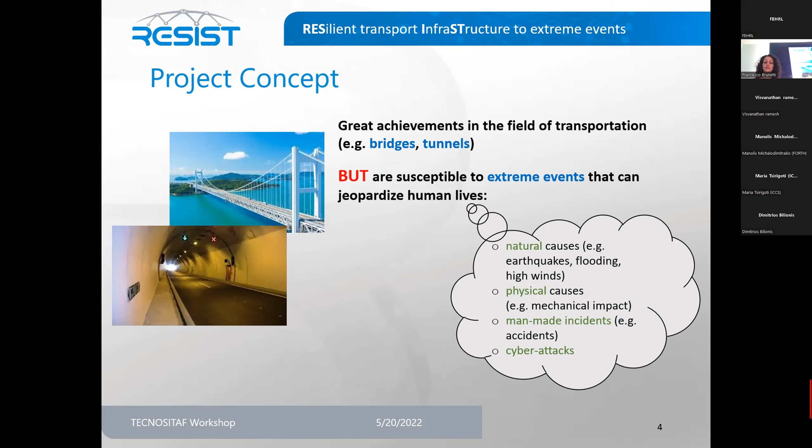Let me start with the concept of this project. So even if we have great achievements in the field of transportation, the infrastructure can still be affected seriously from extreme events that may put human lives at risk. These events may be caused by natural causes, for example earthquakes, floodings, etc., physical causes, or man-made events, or even cyber attacks.

So the objectives of the Resist project are, obviously, to protect users and ensure that mobility will be seamless, avoiding any human cost but also financial costs as well; to prevent and predict such events and also increase the resilience of infrastructure through vulnerability and predictive analysis and risk assessment; and also to react to such events, providing information to minimize the impact and restore services as soon as possible.

Here are the innovations of the Resist project. We have the aerial robots, some custom drones that are used for inspection and also for mounting sensors on bridges and tunnels. We have the ultrasonic sensors suitable for these drones, the computer vision system, secure and resilient communication system.

A cross-layer cybersecurity module, a mobility continuity module that is focused on providing seamless mobility for passengers and freight even under extreme events, and a risk assessment and management of such extreme events. All these are combined in an integrated Resist platform, providing a holistic approach to all these procedures.

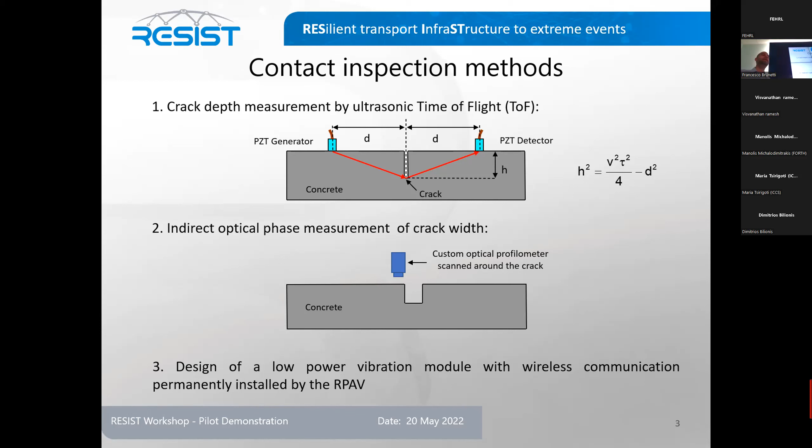Here we can see we have realized this on the left. This pulser receiver unit is a custom solution because in the market we haven't found something with the specification that was needed in the project, because we wanted the possibility to tune the frequency, to use several transducers at the same time, to have an actuation voltage between 350 to 3 kilovolts to use also powerful transducers—that's really important in the measurement of the depth of the crack. Also we have integrated a high resolution time-to-digital converter, to measure with really high precision the time between the emission and the detection between the transmitter and the receiver. Also, this kind of system has USB communication, so it can be easily controlled remotely by using the PC on the drone.

On the right, we can see the integration of this kind of system on two different platforms. On the left, on the top, we have the end effector realized by CATEC in Spain, used for the bridge inspector. On the bottom is the platform realized from the University of Seville with the integration of our module for the tunnel inspector.

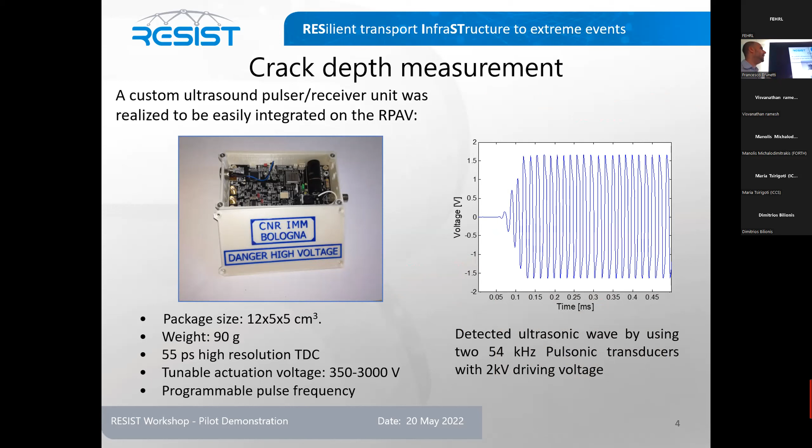Here we can see just an example of an acoustic wave detected by using this custom pulser receiver unit. You can see the signal is really nice with low noise. We can easily determine the time of flight, so the time between transmission and detection, and determine the crack depth.

So instead, here we can see the idea for the optical profilometer. Basically it's a simple optical phase measurement, indirect in particular, like a LiDAR system. We use a modulated laser source that is used to interrogate the target. Then we measure the optical power reflected by the target using an avalanche photodiode. By comparing the phase of the transmitted wave and the detected wave, you can determine precisely the distance.

In this way, with the translation stage inside the module, we can scan around the crack and determine the width. We started from a commercial range meter that we have modified in the firmware and in the optics to reach the specification that was needed in the project. In this case, we wanted to determine the width with a precision of 0.1 millimeter. So also the spot diameter of the laser has to be less than 0.1 millimeter.

So we changed the optics. We go with the drone really close to the crack, because the right distance is the focal length of the lens that we use in the system. And we use also the Goertzel algorithm to determine the phase shift. In this way, we can determine really precisely the width. We have successfully validated this kind of measurement in the drone realized in CATEC.

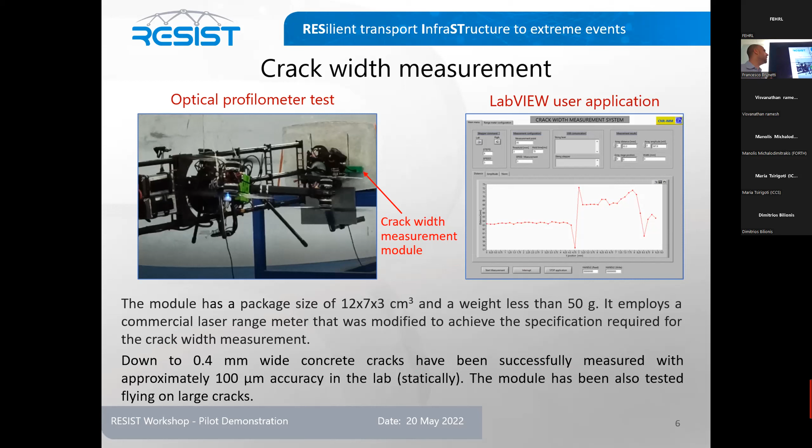Here we can see a measurement realized on an artificial crack sample of concrete there on the left, and on the right the measurement where we have developed a user application where the user can set all the measurement parameters, like the power of the laser, the sampling frequency, the algorithm used, the parameters of the Goertzel algorithm to use in the measurement. And we have successfully measured the width for cracks down to 0.4 millimeter, and we have validated flying on a larger crack.

Here we can see the idea for the vibration module. It's really simple. We use a 3-axis accelerometer from Analog Devices. It is a 3-axis accelerometer with a really high signal to noise ratio, with the digital conversion inside. The user, by means of a user application at the ground station, can set all the measurement parameters, like, for example, the acceleration range, the sample frequency, the cutoff frequency of a low pass, high pass filter that can be used inside the electronics. And in this way, we have created a really small network where each vibration module has an address and can be interrogated by the receiver on the ground.

This module exploits wireless sub-gigahertz communication, so we can have real-time continuous measurement for more than 3 days. But of course, if instead of measuring continuously, we measure only some time during the day, we can have a battery life of months. Also here, it depends on the frequency of the measurement that you want to realize.

Here we can see the integration during the Metsovo trial. Here on the left, you can see the LED. Basically, the drone attached this vibration module. This is really small. It's less than 40 grams with a diameter of 5 centimeters, on the wall by using a UV curable glue. So we stay on the wall just for 10 seconds for gluing the module. And then at this point, the module starts communicating with the ground station by, as I was saying before, sub-gigahertz communication. So there is a continuous communication. So the user on the ground can set all the measurement parameters and so on.

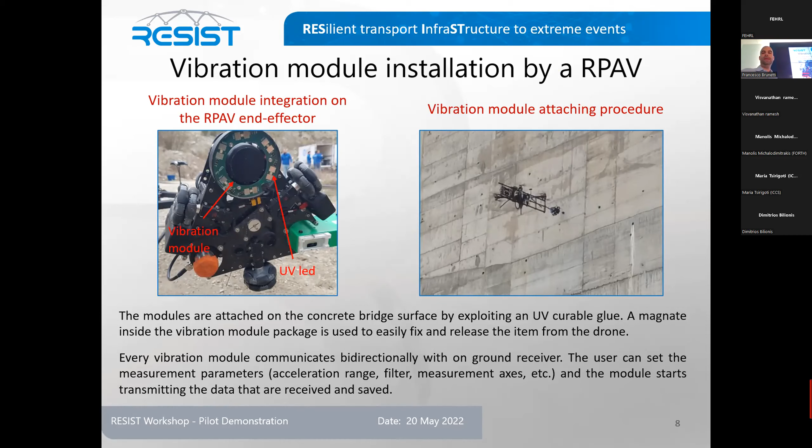Here we can see the user application that we have developed. On the right, it's just really simple. We can see the 3 axes of acceleration with acquisition in real time, but there is also the possibility to plot the fast Fourier transform of the acceleration data, so to see the vibration mode of the structure that you are investigating.

Now, Rafael can continue with the vision, or someone else. Guillermo gets here. Okay. Okay, so let's go back to our schedule with the presentation of the RPAS. Just give us 1 second to change the presentation. Okay.

Okay, good morning. So I'm Guillermo Heredia from University of Seville. So we are going to present the aerial robots, or the drones, that we have developed in the project for installing the sensors that you have seen before from CNR, and you will see later, for inspection of the tunnel surface. So the general idea of the project was to develop not a robot, but a flying robotic system, because there are several sensors that have different needs. So at the end, the main sensors,

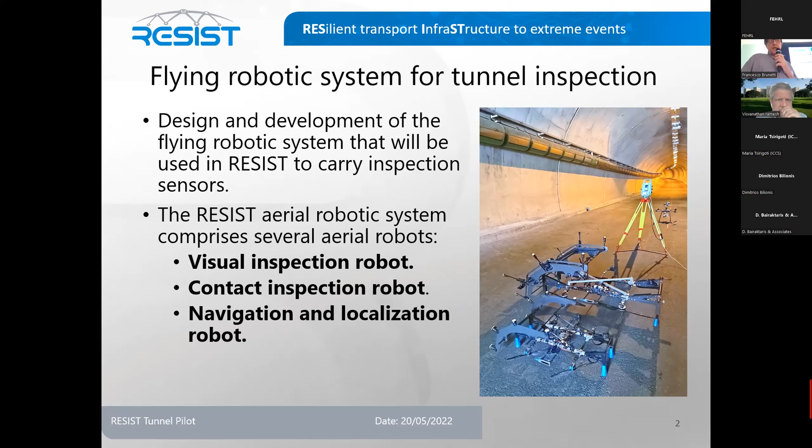we have decided to use 2 different aerial robots. One is for the visual inspection, where we will mount the camera module, and the other is for contact inspection. So the one for visual inspection is a quadrotor drone with adaptations. We have installed a gimbal for camera stabilization and orientation that is installed on top of the drone, so it is adapted to inspect all the inner surface of the tunnel. And also, an important point that I will talk about later is it uses the localization system inside the tunnel for autonomous control, so that it can follow the waypoints of the flight plan that is transmitted to it.

The second one is a drone for contact inspection. So this is a new design that is adapted to the inner walls of the tunnel. So the idea is that it is able to touch and attach to different parts with different inclinations of the tunnel, and with the sensors that are mounted on the tool, it is able to sweep in 2D.

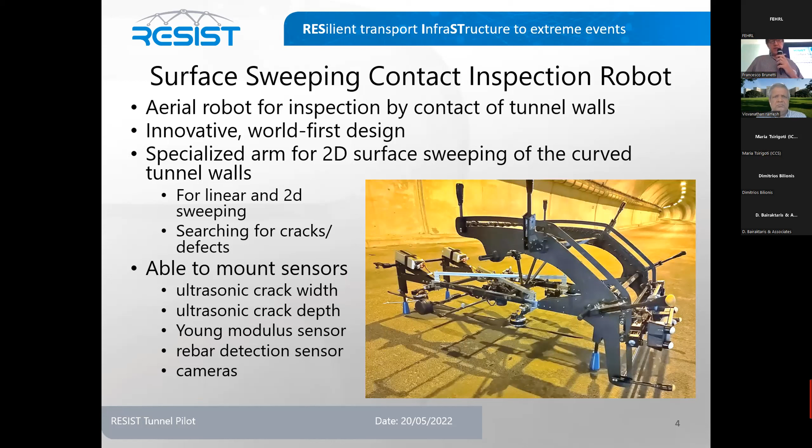So it is able to do linear motion, and also in the curved direction, just to inspect the surface or to look for defects and measure there with more precision. And it is able to mount the ultrasonic sensors, or the Young modulus sensor, also the rebar detection sensor, and also cameras. You can see here the general configuration of the tool.

It has three servos. One is when it's moved around this curved dimension. The other one in this linear direction, and the other one, sorry, this one, is used to adapt to the different inclination of the tunnel walls.

This is the first design of this class, and it is used for inspection of the tunnel walls. You can see here some experiments. The idea is that with these supports, it is able to touch the different inclinations. So in this part, it would be higher, and with these two supports, it would be even higher. And you can see here that this is the image of a camera that is mounted on the cart. But there we can mount any of the sensors that we are discussing today.

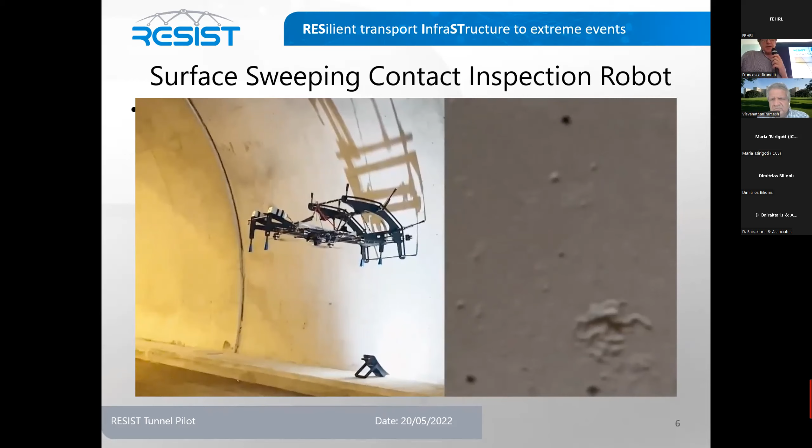Then an important point is the localization. So for autonomous flight, it's very important that the aerial robot knows in any instant where it is in relationship with the environment. Inside the tunnel, it is not possible to use the usual methods for localization, like of course GPS or GNSS, or even the vision-based or LiDAR-based SLAM techniques, because of the symmetry that the tunnel has. It is impossible to use them because it gets confused about the position.

So we have developed a localization system that uses on one hand a total station that calculates the position with a prism on board and transmits it to the drone, and also some onboard sensors that are two 2D LiDAR sensors and one range sensor. The 2D LiDAR sensors are used to obtain the relative position transversal to the tunnel.

You can see here the output of both lasers. One is this curve, that is the transversal position, and the other one that is in the horizontal position is just used to obtain the distance to the wall. And with these two, it is able to localize in this transversal plane, and also to close the loop to be able to touch and autonomously attach to the surface. The other one, that is a range sensor, is used to obtain the position along the tunnel line in the longitudinal position.

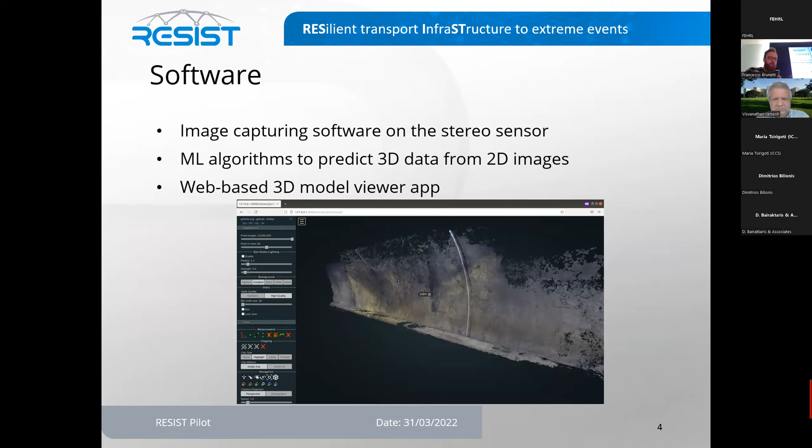And finally, as mentioned, we have the web-based 3D model viewer app, which you can see here, and we'll later get a video on how this interacts with the components. Thank you.

Thank you, Rafa. So for the next presentation, we will have our colleagues from our group who will present it online. Can you give me access to the screen share? Yes, you have it. Okay, thank you.

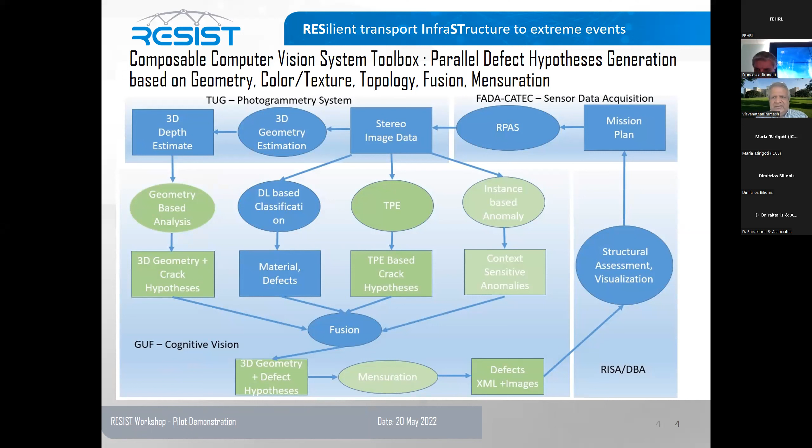Okay, I'm Viswanathan Ramesh. I'm from the Goethe University in Frankfurt. We did the computer vision part. As already mentioned in the beginning of the whole presentation, the whole architecture involves essentially taking the drone-based images, sending them to 3D reconstruction and getting stereo data, and then doing analysis.

The main aspect of what we have been doing in Frankfurt is to build a composable toolbox that allows you to deal with a variety of situations and flexibly use our modules and compose them so that we can perform the inspection task. And it has certain parallels to human intelligence and the way in which we think about cognition. Now, what I'm going to do is quickly show some of the work that we've done in the context of RESIST, and also the results we got from the particular pilot.

So we have a variety of different modules which address various aspects of visual inspection, which go all the way from using physics-based models and understanding the properties of the application in the physical context, and then using them to build algorithms where expert knowledge is embedded so that you can reduce the amount of data required for analysis, or in other words, for training and learning.

Then there is the other side of the equation, which is that we need to have invariance, meaning that we need to be invariant to lighting, weather, and other conditions, and therefore we need robust methods. So we have a modular approach where we can implement a multitude of modules, each addressing sub-aspects of the problem, and then they all run in parallel and combine.

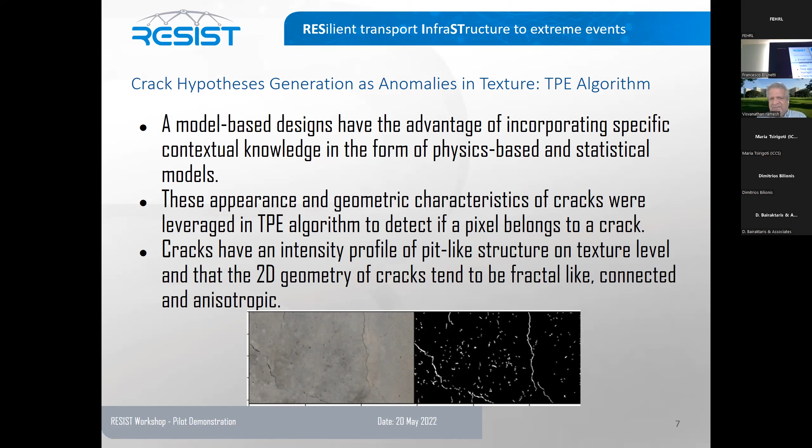So you can see that with the physics-based models, given an image like this, you can produce hypotheses. We think of each of these parallel modules producing hypotheses. So here you can see that in this particular image, you can get a lot of the cracks and also small defects, which are not necessarily defects. And the point is that cracks are treated like fractals, and they are connected, and they are anisotropic.

And one of the major innovations that we have done in this project is this idea of using just one image instance, using these model-based ideas from physics-based models, combining them with modern deep learning, where the deep learning method learns the background texture from a single image.

So what we do is that we take a single image and then we produce some response like this, and then we use that response to mask the image and say to the neural network, learn the background pattern as much as you can, and then try to fill whatever you don't see here.

So in a sense, it's more like saying, okay, I have an assumption about the world, meaning that the texture is continuous, and that texture you learn from that particular image, and then you compare them. So effectively, it is more like a background subtraction. So this is what we have done. And here is an illustration of that work where you have the original picture, and then you can see this neural network learning actually the background estimation, and then the difference coming out.

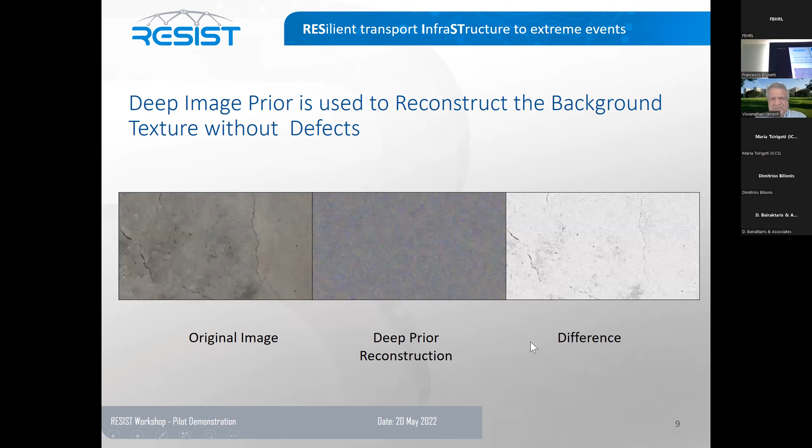Now, then you can see certain results on real data sets. Then I'm going to skip that. And now there is the other angle that was basically a novel innovation in this project. That is actually the fact that we now use 3D data with the TU Graz. So therefore, we can actually think about how 3D geometry, along with actually cracks, can be essentially extracted.

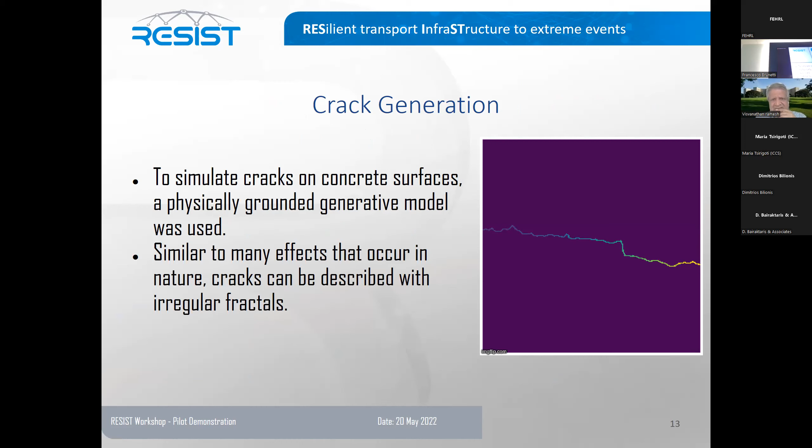And then the next slide will show you basically how we take that data and then we can produce all kinds of things like graffiti, moss, and other types of defects so that you can sort of simulate reality using a whole range of perturbations. And then you can use those data sets along with the architecture to take this input data and separate them into cracks, surface normals, and then depth variation.

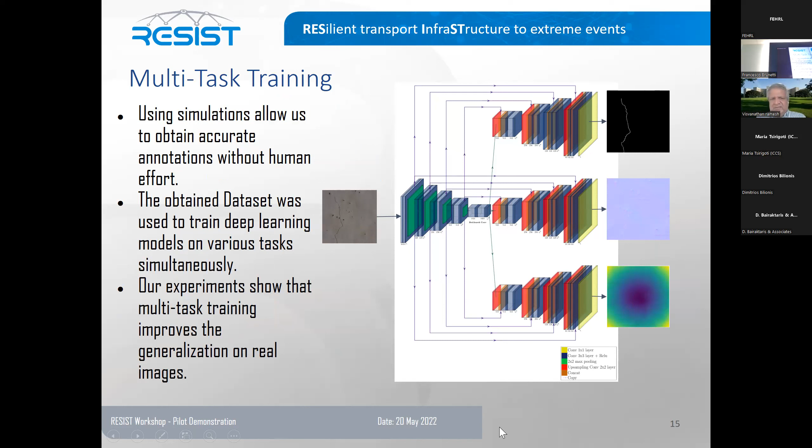And what we have shown in the pilot is that this actually works. We'll show you later that this method works with the tunnels. One of the key requirements is that the simulation has to be close enough to real in order for the simulation to transfer to real. And this is a well-known issue. And so therefore, the whole issue is how to bring simulation models close to real. And here you see results from other data sets which show that this technique works.

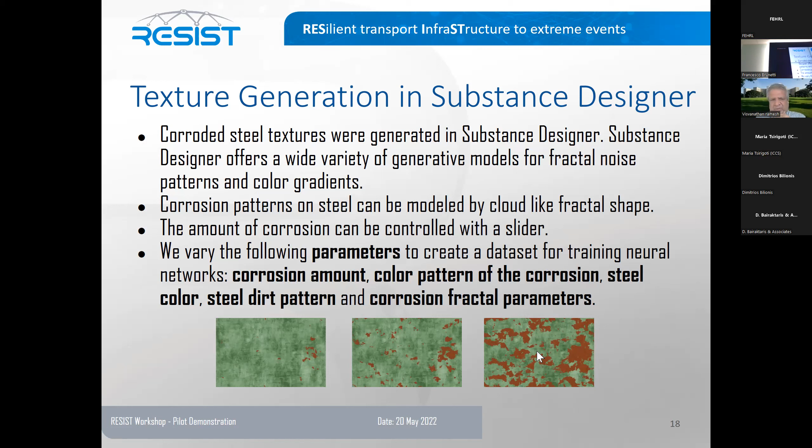And then we also did the same for simulation of steel bridges and corrosion. So again, the idea is that you think about a material and the material degrades and there is a physical process and we can model the degradations. And you can use now modern graphics tools to simulate these types of material patterns and then generate a variety of examples from which you can then train a classifier, which then can be used on real data.

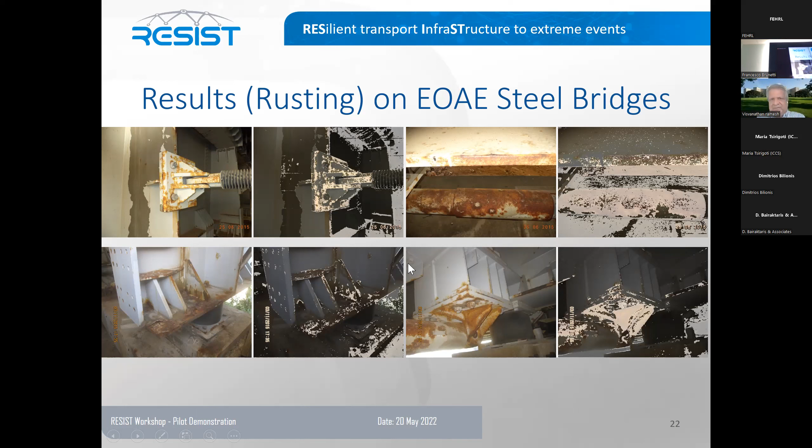Here you can see that the corrosion part of the scene is sort of highlighted as the dominant ones. And you can see it is not absolutely perfect because you need further real data and real training to augment it. But nevertheless, the concept is validated. And this also has been validated with the concrete data, with the exposed bars and corrosion.

And the other aspect that is new here, essentially, is that we also have the 3D geometry. So we can directly process the 3D geometry and try to use information to get back especially the surface variations. And that also can help you in classifying. So we've adapted that here, and we've used it in the typical applications which involve taking this image at a distance of 2-3 meters. This is not necessarily useful, but when you go closer, it can be useful.

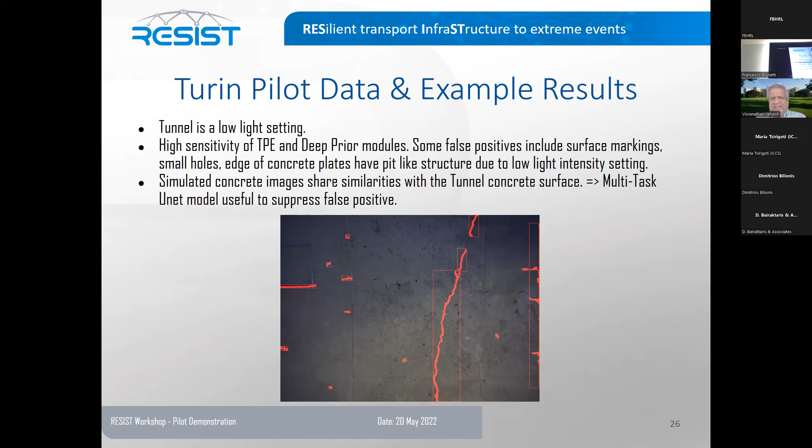And this is the result that we got from the Turin pilot data. So you can see the actual tunnel data and then the kinds of hypotheses and results we get. We also have a user interaction where you can allow a user to mask off some things that they don't want or to select and reinforce some points. And here are some examples of these different modules working in the Turin dataset.

And you can see here, this is the topology piece getting a lot of hypotheses. And this is that MultiUnet simulation-based training method, which also does a good job in extracting the crack hypotheses. And then when you fuse it, you can actually get a pretty good estimation. Similarly, you can do the same on the other data sets.

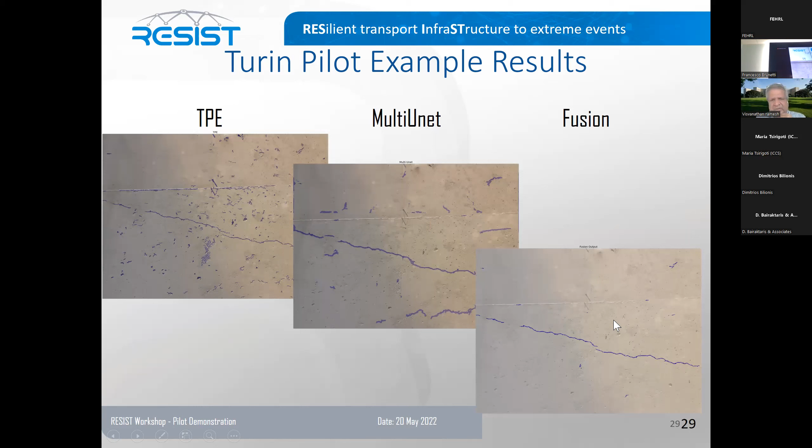So this is also showing that these methods are actually already doing their job, and a combination of them helps you in improving. The exact nature of how to combine is further work to be done, which depends largely on a large amount of data and integrated training. We already have the process for that. And you can see here clearly the combination of these things allows you to make progress. I didn't show the human interaction piece, but you can guess how that works.

So in a sense, what I want to summarize is that we have confirmed that our systems engineering methodology works, and it has the flexibility to build a portfolio of algorithms and combinations for a range of visual inspection tasks. So that's one major finding. The other thing is that we could show the use of simulations to transfer to real. We also showed there are some limitations, but the limitations are already explained by design. Therefore, we don't have surprises.

And then the key point is that properly integrating a human into the loop would be a major step towards commercializing this type of solution into practice. Thank you.

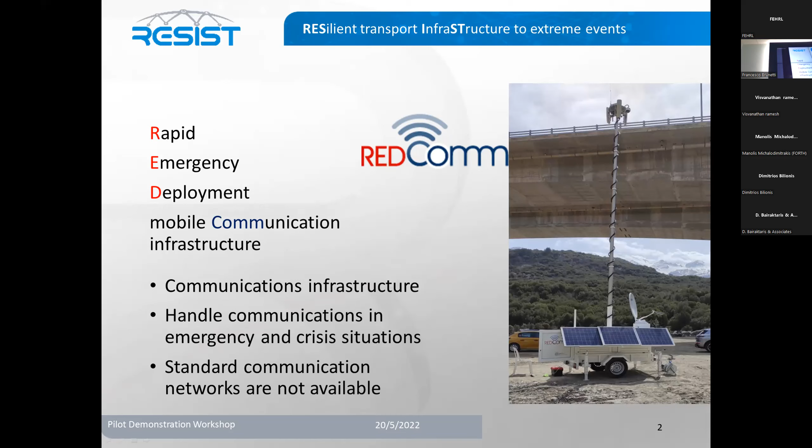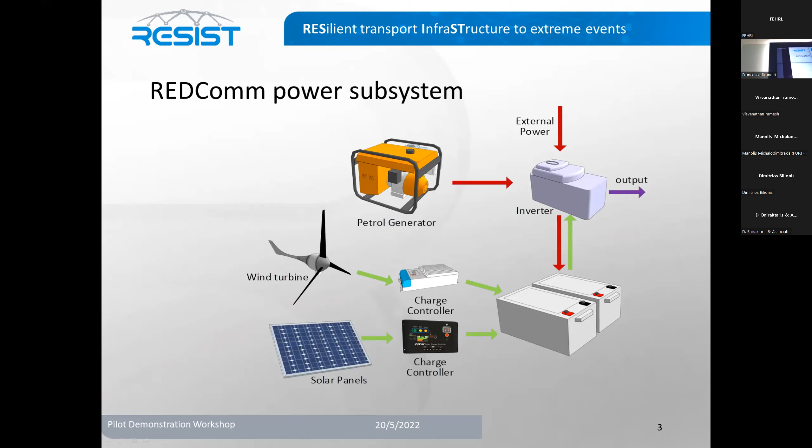So what we did was build a trailer that we can move around and put in it the equipment necessary for the communications. First of all, how do we power the REDComm? The power supply is provided by an inverter, which has 4 available options: external power, a petrol generator, a wind turbine, and solar panels. The solar panels and the wind turbine charge 2 batteries connected with the inverter. The inverter, the batteries, and the generator are inside the trailer. The wind turbine and the solar panels are mounted externally on the trailer.

Regarding the network deployment, we have 3 options for internet access. We have an LTE modem, which uses SIM cards to provide internet through cellular data. We have a satellite modem to provide internet through satellite. And we have several access points that can be used as clients to receive internet access wirelessly from another wireless station. Of course, there is also the option to plug in a cable. Additionally, on top of the REDComm, we have an IP camera to view from higher ground and a GSM base station that can provide cellular coverage to mobile phones nearby. The access points, camera and GSM base station are mounted on a mast that can reach 9 meters height. This mast is retractable for easier transportation.

Inside the trailer, we have installed a server powerful enough to host the whole RESIST platform. This server uses Hyper-V as a hypervisor, and all the RESIST components are installed in virtual machines. Having all this inside the REDComm offers faster transfer speeds. Additionally, having all the virtual machines enables the use of a global intrusion detection system. The REDComm has 2 compartments. In the first, we have the inverter, the generator, and the chargers from the wind turbine and the solar panel. In the second, we have a rack with the server, the monitor, the modem, the router, and the switch, all connected.

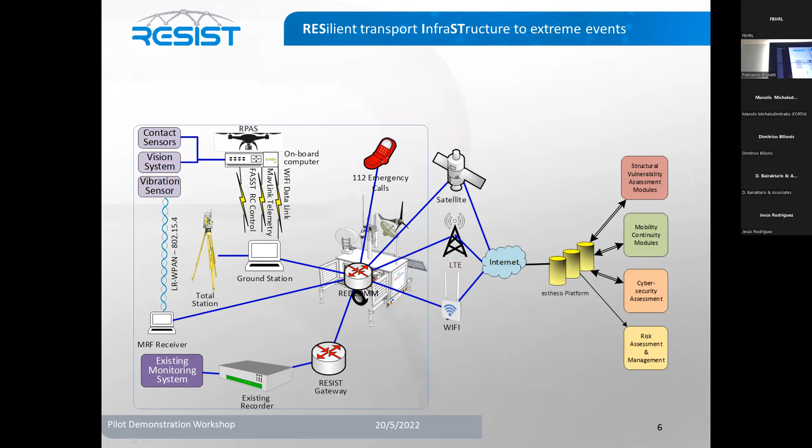How the REDCOMM fits with the rest of the RESIST components: as I mentioned, the server with all the virtual machines that run the rest of the components is inside the REDCOMM trailer. The drone, the ground station, etc. are in direct communication with the server via the REDCOMM. This is how the REDCOMM looks. And this is the end of my presentation.

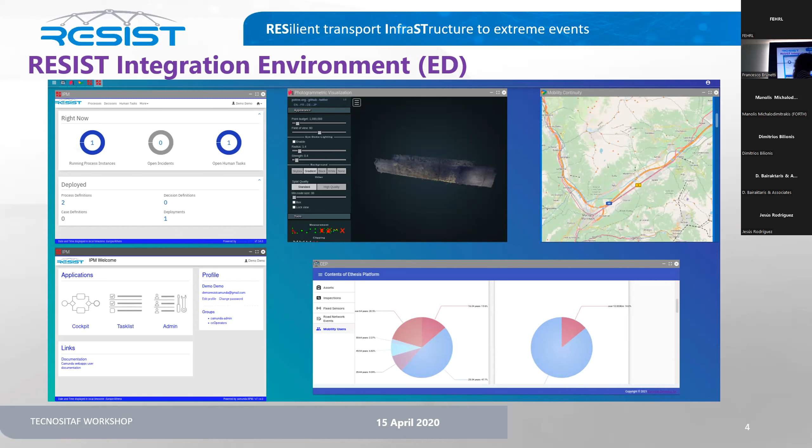Here you can see what is going on with the instances of the processes that are running. Here you can see the photogrammetric replication of, I think, the tunnel, the mobility continuity module, and here is access to the data that has been collected in the platform.

The whole process of the inspection has been detailed in a very detailed workflow, as you see here, that includes all the operators that are involved. For example, the control center operator who initiates the inspection because he sees a need to go to a specific place, the Rpas operator who has to manage locally the Rpas, the user of the computer vision system, and all the other players that are involved. There is a specific workflow that is followed. There are two versions of the inspection process.

This one is the complex, the most detailed, that includes all the components. That is the process that takes place when there is an identified point of interest in the infrastructure, and this has to be further evaluated using all the components of the system.

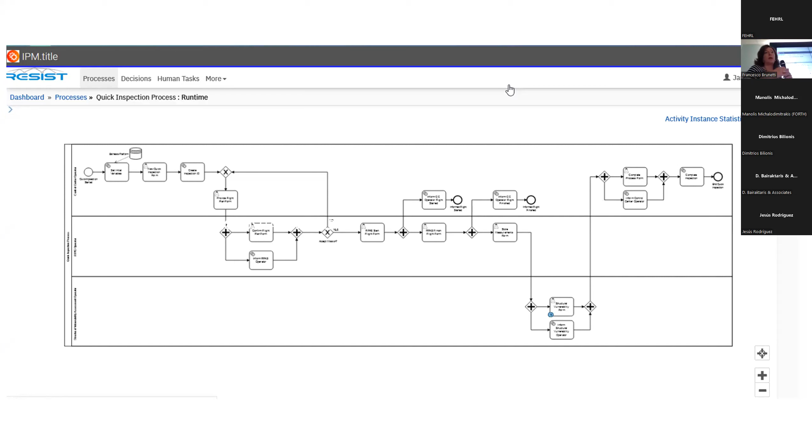And then there is a quick inspection process that is used to initially identify the points of interest. So a drone is just sent on a mission to monitor the infrastructure from a high level and identify the areas of interest. This represents the workflow actually implemented in the system with the various roles of the users involved, executed during the mission. Every actor gets informed when he needs to perform a task.

So yeah, that summarizes the integrated environment. Thank you.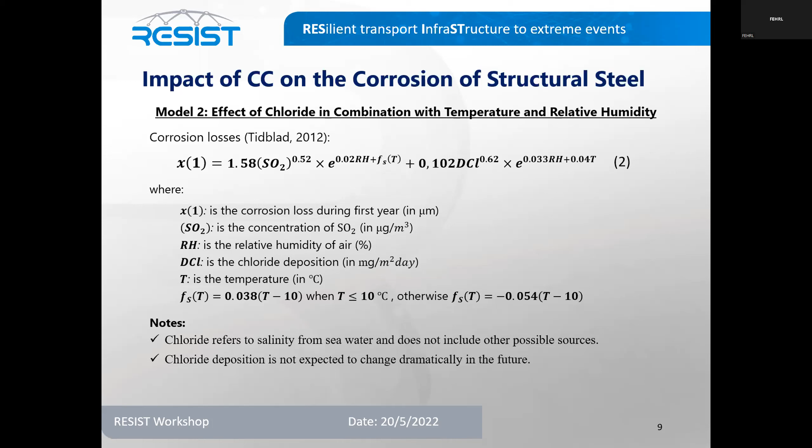The difference from the first model is that in this equation we should also take into account the chloride deposition. We should keep in mind that chloride herein refers to salinity from seawater and does not include other possible sources, and according to predictions, the chloride deposition is not expected to change dramatically in the future.

The application of the second model in similar scenarios of sulfur dioxide concentration, relative humidity, and temperature shows that the expected increase of 2 degrees Celsius in temperature can have a significant negative impact on steel corrosion in environments with a high chloride concentration. This is evident if we look at the numbers and see that for huge chloride concentration, we have a greater increase in corrosion rate due to increased temperature.

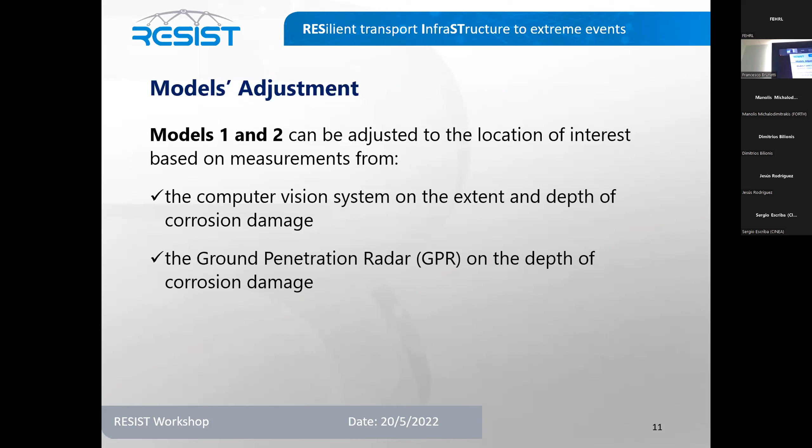Both models can be adjusted to the location of interest based on measurements from the computer vision system on the extent and depth of corrosion damage, and the ground penetration radars on the depth of corrosion damage.

Regarding the corrosion of rebars in reinforced concrete, there is a number of models proposed in the literature, such as the one by Andrade et al. According to that model, the crack width at time t is a function of the corrosion penetration, the concrete cover, and the original rebar diameter.

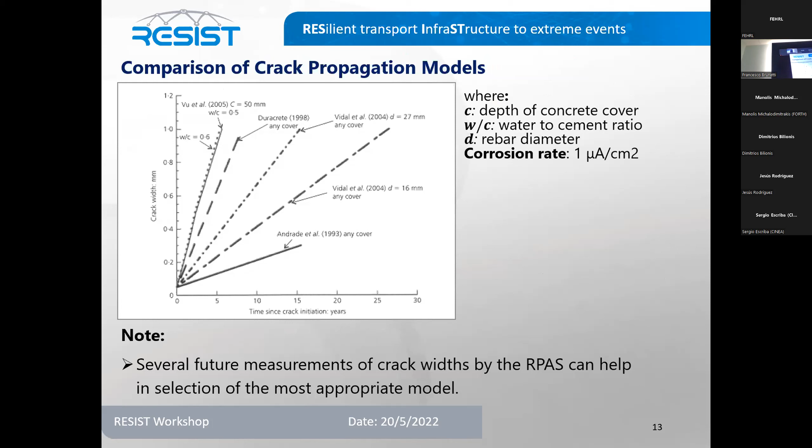Furthermore, as we said, there are a lot of models proposed. We can say that the RPAS system can be used, based on its measurements, in order to select the most appropriate model that fits in our case.

Regarding the impact of climate change on the corrosion of reinforcing steel bars, and focusing on the carbonation index, there is a number of papers published in the literature, and the majority of almost all papers predict that the estimated value of carbonation depth by year 2100 will increase by around 40 to 45%.

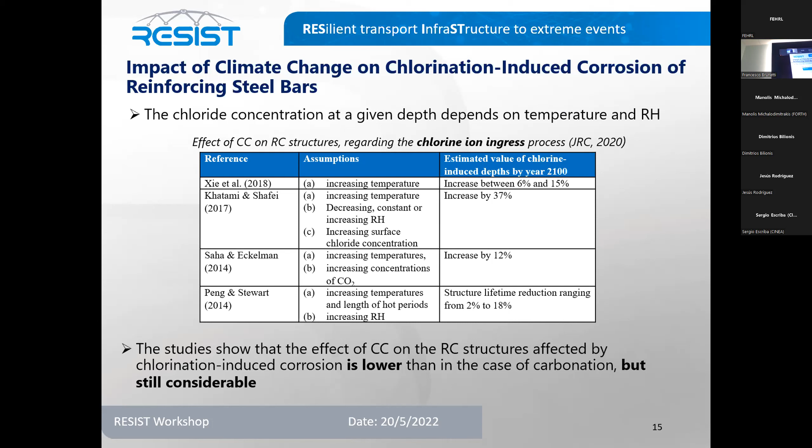Now, if we consider the chloride concentration, then we can see that there is also research published on this topic. However, there is no consensus regarding the increase in the value of chloride ingress depth by year 2100. However, we should point out that all studies show that the effect of climate change on the reinforced concrete structures affected by chlorination-induced corrosion is lower than in the case of carbonation, but it is still considerable.

Regarding the impact of climate change in the presence of both chlorination and carbonation, to our knowledge, there are no studies that evaluate that impact in the presence of both carbonation and chlorination.

So to conclude, we should say that there is a need for accurate mathematical models accounting for the effects of climate change, specifically the change in temperature, relative humidity, and carbon dioxide levels on material degradation. Based on the results of the RESIST project, we found that the expected increase of 2 degrees Celsius in temperature can have a significant negative impact on steel corrosion only in environments with a high chloride concentration.

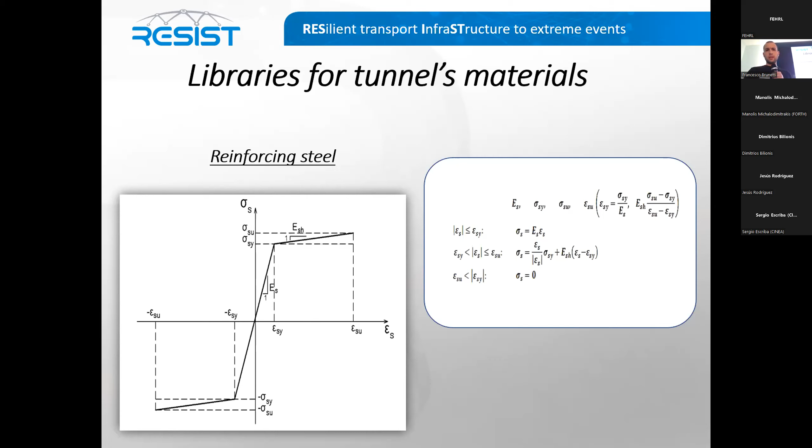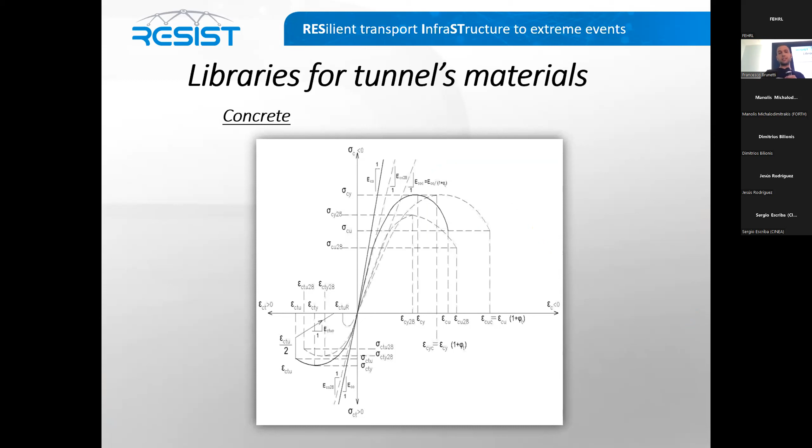Regarding the constitutive laws of materials, reinforcement steel with hardening branch, as we see on the right side, with constitutive models. For concrete, the compressive branch and tensile branch until the ultimate stage.

The constitutive law for the stress transfer at the interaction surface between the reinforcement and the concrete, due to friction and mechanical interaction, is introduced through this modeling.

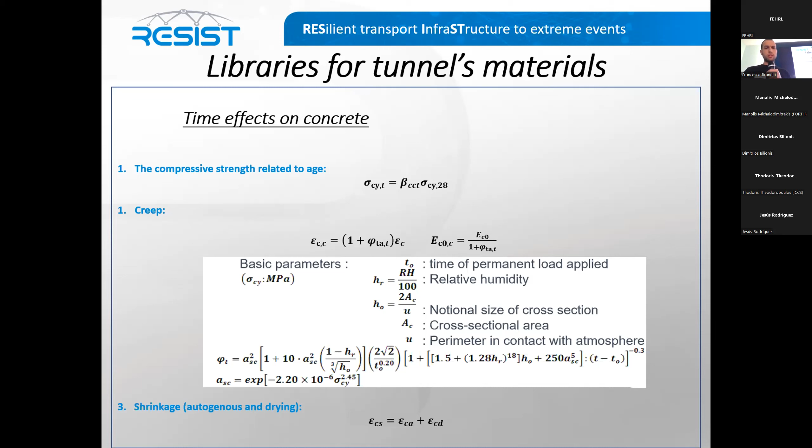Also, we have taken into account time effects on concrete regarding the strength related to age, the compressive strength of concrete related to age, the creep, through the creep coefficients for the permanent loads applied, which takes into account relative humidity and the perimeter in contact with atmosphere. Also, the shrinkage, the autogenous and the drying shrinkage, are also taken into account.

We have implemented tools for temperature effects regarding the changes in the properties of materials at high temperatures for cases of fire.

The main tools that we have implemented are, on one hand, the local condition assessment, and on the other hand, the global. I'm sorry, can you hear me? Okay. The local condition assessment and the global condition assessment.

What are the measurements that are needed? At the visible internal perimeter of the tunnel's cross-section, we need cracks' geometrical measurements regarding the width, the depth, the multitude, if we have a multi-crack, and if we have a multiple crack, we need the spacing. We also need the crack's location.

For a slice, for a constant distance along the axis of the tunnel, we need the XZ of the crack. Also, for the global condition assessment, we need the deformed shape of the perimeter and the resulting convergences at 6 pairs of characteristic points with respect to the initial and undeformed shape.

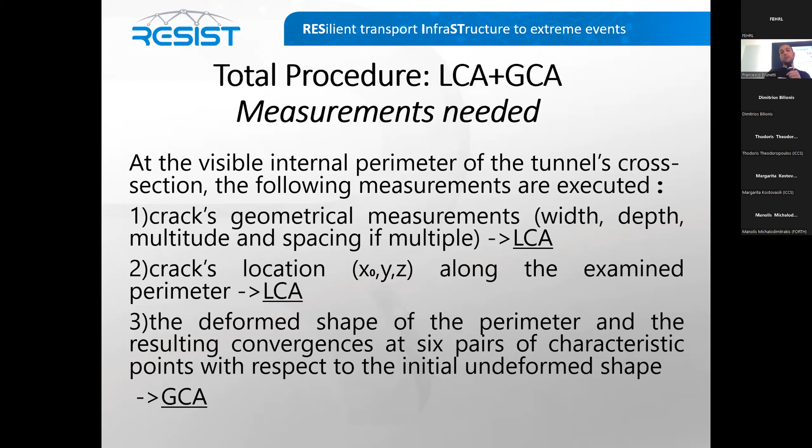For the local condition assessment, we make the assumption of linear distribution of strains along the cross-section, and so the strains of concrete at the upper and the lower planes are related with the strains on the reinforcement steel through the curvature and the axial strain.

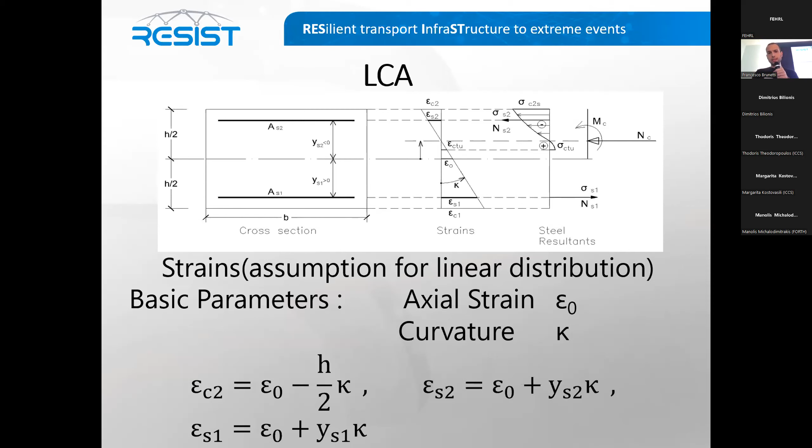Now, according to the theory of Dr. Dimitris Bayraktaris, through the crack width the strain on the steel is estimated. Down we see the diagram at the point of the crack, where the concrete does not take any strains but has only the residual strains after the ultimate state, and all the strains are taken by the reinforcement steel. From this point, the curvature and the axial strain are calculated.

After we have the axial strain and the curvature calculated, we are able to calculate the internal forces, the safety factor, and the stiffness factor, given the crack geometrical characteristics and the position of the cracks.

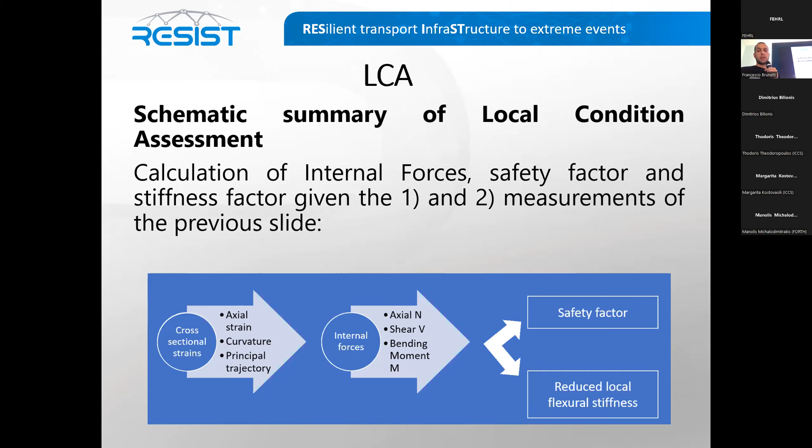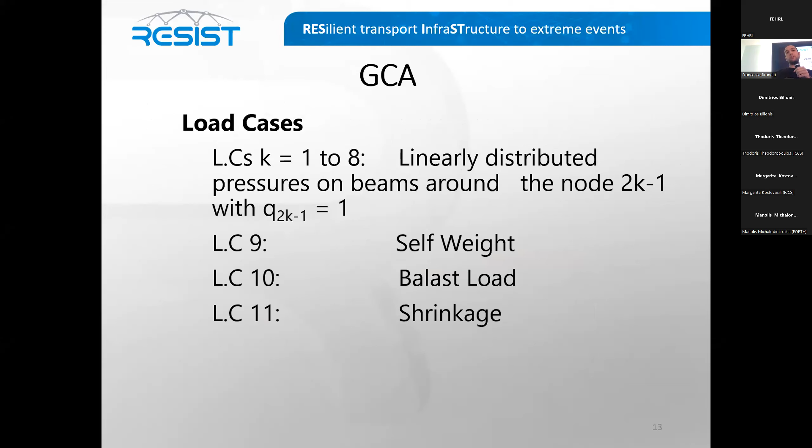After this stage, we go to the global condition assessment, and here we see that the whole cross-section is separated in 36 parts. The calculation of the soil pressures and the internal forces, axial force, shear force, and bending moment along the perimeter of the tunnel is based on convergence measurements along six chords. The six chords we will see on the next slide. The load cases are linearly distributed: the self-weight, the ballast load, and the shrinkage.

So we have a question on the chat. Dimitrios, could you please help us with this question? Yes, it is a very interesting question. However, to be honest, I cannot answer it at this time because I have not performed the corresponding literature research, because I entered the project at a late stage. But I can pass the question to my colleagues and get back to you with more information.

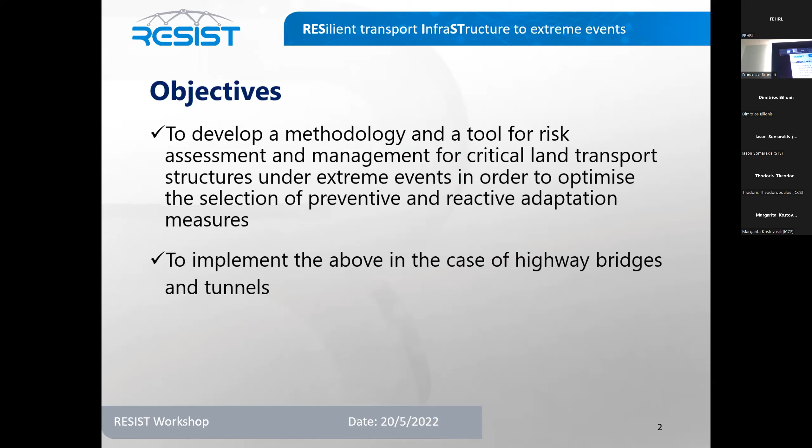The presentation is about risk assessment and management of critical highway structures under extreme events. The objectives of this task were to develop a methodology and a tool for risk assessment and management for critical land transport structures under extreme events, in order to optimize the selection of preventive and reactive adaptation measures, and to implement the above methodology in the case of highway bridges and tunnels.

Risk management can help us decide whether a protection and adaptation measure should be implemented or not, and the final decision is based on its cost effectiveness. If after performing risk analysis and cost analysis we find that the measure is cost effective, then we can implement that measure. If not, then we should not implement the measure and do nothing, so leave the structure as it is.

Of course, it is obvious that a hazard event will affect our structure, which in this case might be a highway, bridge, or tunnel, and can cause damage or loss of function. Any damage or loss of function can have social, economic, and environmental consequences. Especially for social and economic consequences, we may have direct or indirect impacts on the structure, the operator of the structure, and the society.

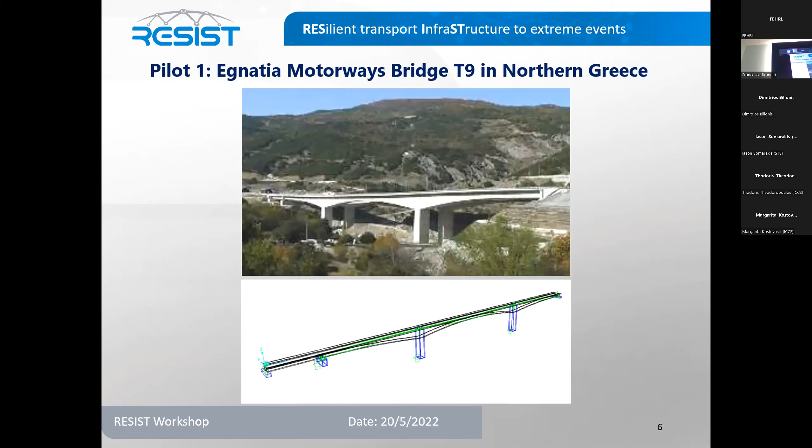The hazards under study are earthquakes, explosions, fire, landslides, scouring of the riverbed, floods, high winds, and cyber attacks. We should mention that all the above have been studied in tandem with adverse climatic conditions that may accelerate material degradation. The first pilot of our project was the Egnatia Motorway Bridge T9 in northern Greece.

For this bridge, we have estimated the monetary consequences of damage without protection measures, and we have used two scenarios. According to the first scenario, an incident happens when there is the average number of vehicles on the bridge at the time of incident, and based on our calculations, in that case, the total direct cost will be around 12.5 million euros, while the total indirect cost will be much higher and will be close to 2.25 billion euros.

In the second scenario, the same incident happens when the maximum number of vehicles are on the bridge at the time of the incident, and while the total direct cost is the same as the previous scenario, the total indirect cost is slightly higher as expected.

So, if we consider as protection measures the strengthening of water pumping, water drainage works at the eastern abutment by a new drainage tunnel and new water wells for pumping underground water, a measure which will cost around 5 million euros, and considering that our incident is an earthquake with probability of occurrence equal to 0.009 as the extreme event, we can calculate the break even.

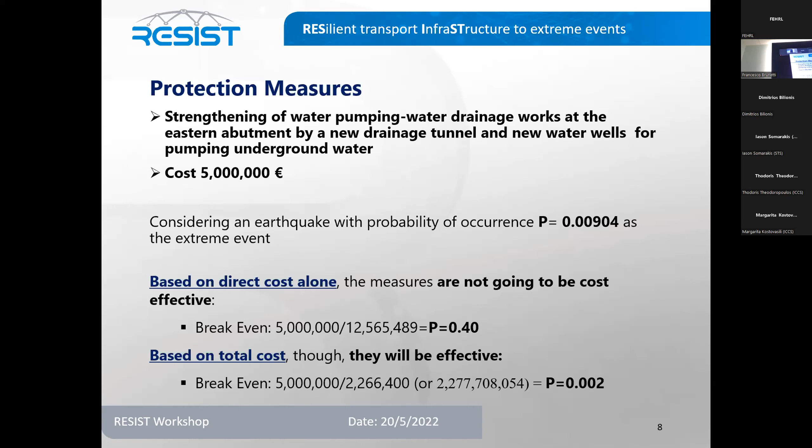Furthermore, we have applied the first scenario, and we have tried to estimate the benefit from the use of RPAS in the inspection and integrated assessment. In this scenario, we assume the average number of vehicles on the bridge at the time of the incident. And according to the calculations for direct and indirect cost, we can find that the incorporation of RPAS may save approximately 125 million euros.

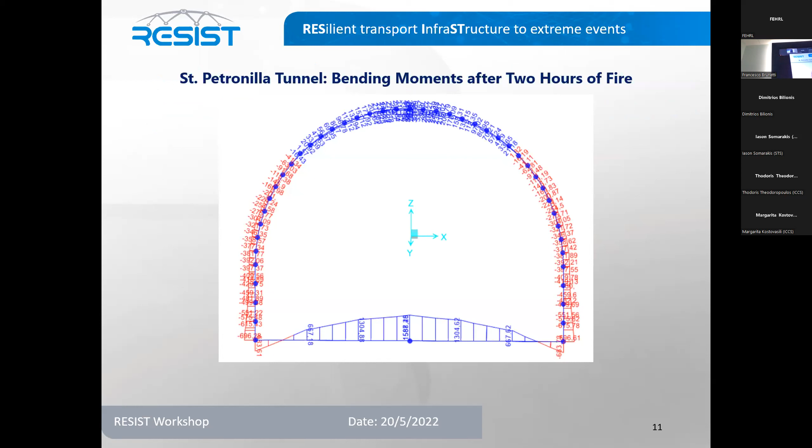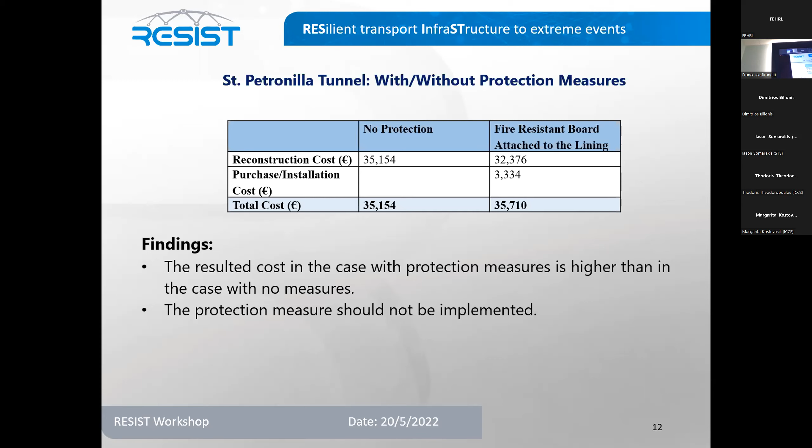The second pilot of the RESIST project was the St. Petronilla tunnel in Italy. For this structure, we have simulated an event of fire with duration of 2 hours. In this graph, you can see the bending moments inside the tunnel. We have performed the cost-benefit analysis, and we found that the resultant cost in the case with protection measures is higher than in the case with no measures, slightly higher by around 500 euros. So the protection measure will not add anything, and we can say that there is no need to implement it.

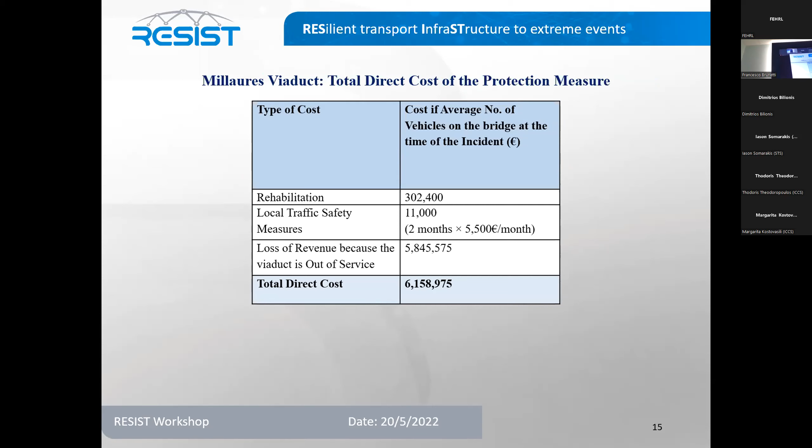And the third pilot was the Millaures viaduct on motorway A32 in Italy. In this case, this table is for no protection measure, and if the average number of vehicles are on the bridge at the time of incident, the total direct cost is around 18.7 million euros. And in case we apply protection measures, we can see that the total direct cost is around a third as compared to no protections, close to 6 million euros. Thus, we can estimate that the break-even is around 0.32.

And in our case, we consider an earthquake happening concurrently with high winds and a heavy truck in the middle of the bridge, with a probability of occurrence less than 0.1, so the protection measure is not cost effective since it gives a break-even higher than 0.1.

So to conclude, we can say that the duration of reinstatement of operability dramatically affects indirect costs. Based on direct cost alone, proactive strengthening may not be cost effective regarding extreme events. However, indirect costs and specifically travel delay costs to the road users can be a multiple of direct costs. And based on total cost, including indirect cost, proactive strengthening may be cost effective regarding extreme events.

So it is evident that if you incorporate indirect costs in your analysis, you may get a different result than if you limit your analysis only to direct cost. So indirect costs are important. And finally, robotic inspection can make a significant contribution to both direct and indirect costs.

However, in this methodology, there are some challenges which are due to the data gaps that exist regarding the construction costs, the construction duration, pace of restoration and reinstatement of operability, cost of travel time, fatality cost, and use of bridges and tunnels. So the more data you have regarding these aspects, the better models, predictions and decisions you may make. Thank you very much.

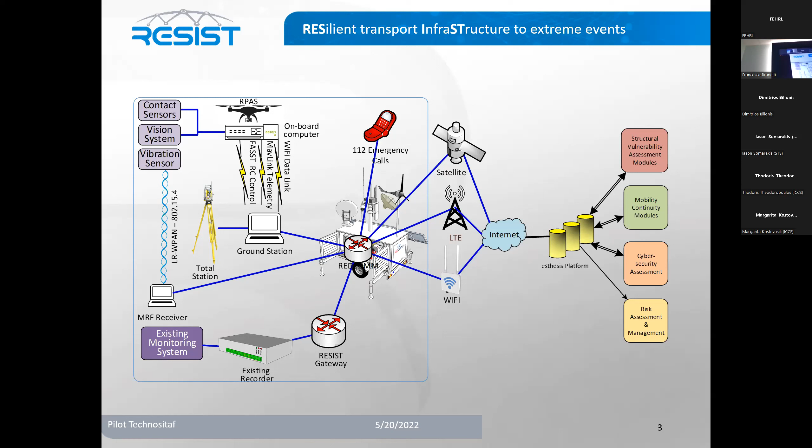If you can see on this figure, this is the network architecture of Resist. I'm going to place some of these components in this figure so you can get an indication of where they are placed. For example, the intrusion detection system is placed on the backend level. We have resilient communication across all types of communications in Resist available through Redcom. We have cryptographic operations in most of these communications, especially between the ground control station and the RPAS, or between the Redcom and the backend.

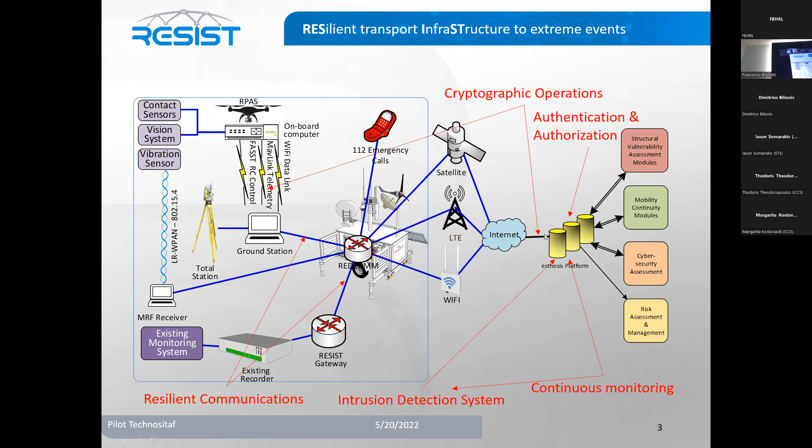We have authentication and authorization in our universal login page, and we have continuous monitoring of various services such as the systems running on the backend or even the security controls. These are just indicative placements. There are many more in place actually. So now a few screens of the cybersecurity controls.

Specifically for the intrusion detection, we are using Cloud IDS. That's an implementation provided by FORTH and is responsible for identifying attacks on a network level that originate from outside the Resist safe intranet, but also originating internally, if, for example, an internal VM is compromised and tries to attack other VMs, other systems of Resist. The IDS is deployed on a hypervisor level to have an overview of all other subsystems deployed there, and it also enables statistics about the attacks, as you can see on the figure, such as the sources of the attacks, the type of the attack, and how many of these exist.

Next, we have the Early Warning Intrusion System, EWIS. That's basically a honeypot that is responsible to appear as a vulnerable service so that attackers try to exploit it, so we can get some interesting insights and trends about the attackers, such as the country that the specific attacker is executing their attack from, the network ports that they are targeting, or even the type of traffic that is coming, UDP or TCP. These are just two indications of the security controls.

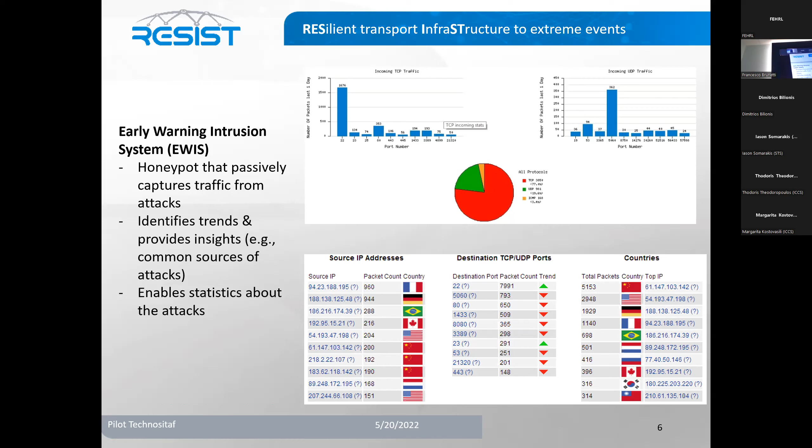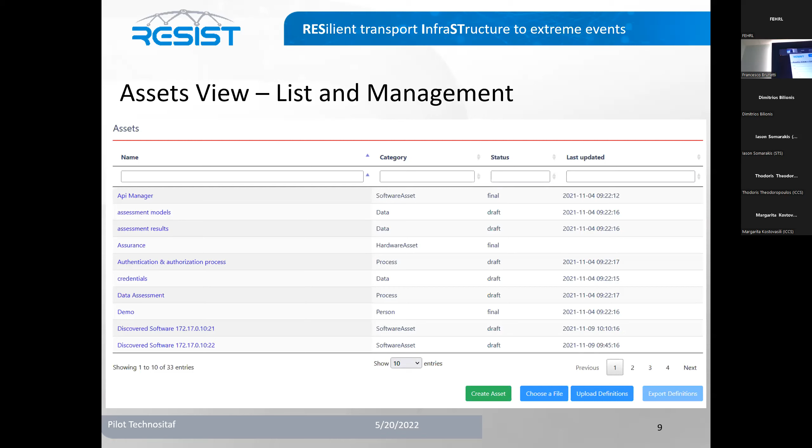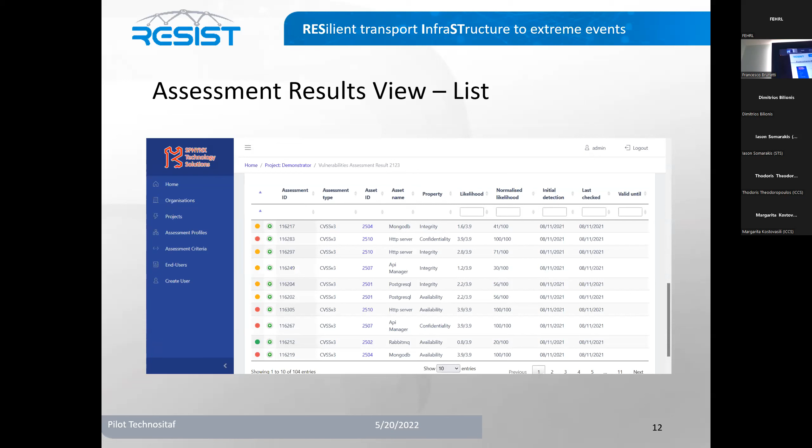Penetration testing is a bit different because it depends on the tool that is used to generate the results. In this case, since we're using OpenVAS, the results are mapped to what OpenVAS can provide. And in this case, it gives you an extra technical flavor on what this vulnerability is, how it can be exploited if possible, and how it can be mitigated if possible.

Finally, we have the results for continuous monitoring. That's also very specific results depending on the monitoring rule. In this instance, we are trying to make sure that the asset is available at all times. So if a violation is found, we get an alert that the asset is down, you should take a look at it. And this basically concludes my presentation.

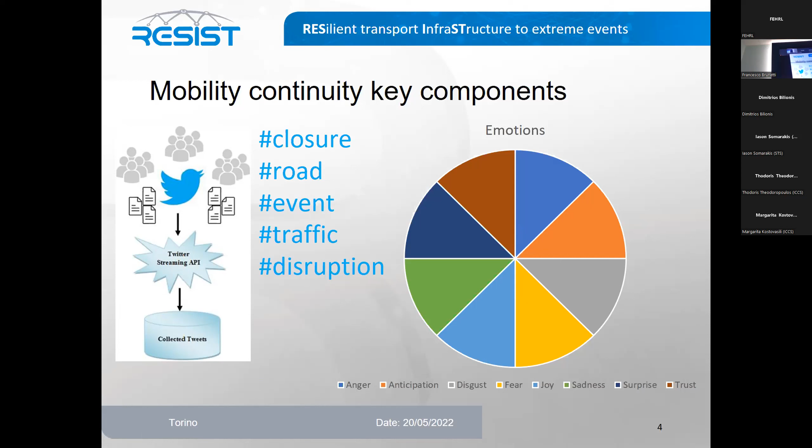Also, we have a questionnaire which can be filled in by users once they first log in within the application, and within that questionnaire, we ask some basic questions that enable us to do the behavioral analysis as developed by BGU. This functionality has been integrated within the app, and based on this questionnaire, we can deduce 3 basic classes of drivers: drivers that need support, drivers that would like support, and drivers which are in general cool and which can also receive support.

The basic difference between these 3 classes is that for the 2 classes, we have to be really careful regarding the way that we show messages. We cannot show messages while driving, whereas for the more experienced and the cool drivers, we can also provide some messages while on the move.

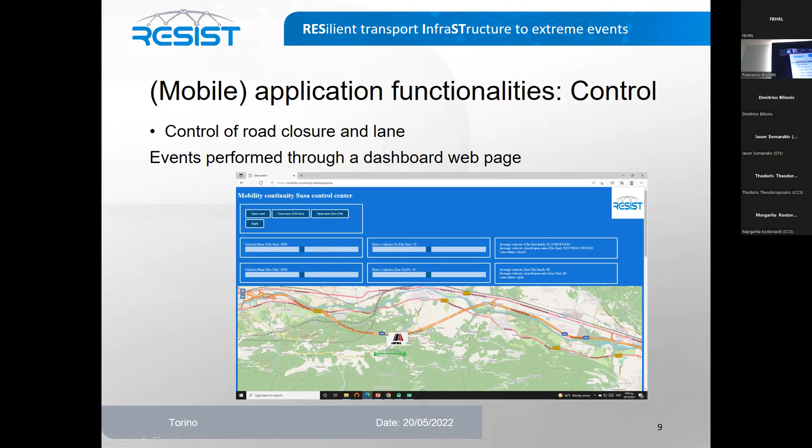So what we have is the operator dashboard, and the operator dashboard enables the road operators to either activate an event on a given region, or also provide some basic inputs for the simulation of mobility, such as the amount of traffic in the sense of vehicles per hour, and the amount of heavy vehicles occupying the road, in order to get an estimate regarding the average velocity along a route, which is also notified to the users through the mobile app that you saw before.

Sorry. Also, we get an estimate of the average velocity and a closed to open lane ratio for the operators, in order to also have another metric of how much lane closure has affected the overall traffic on the road.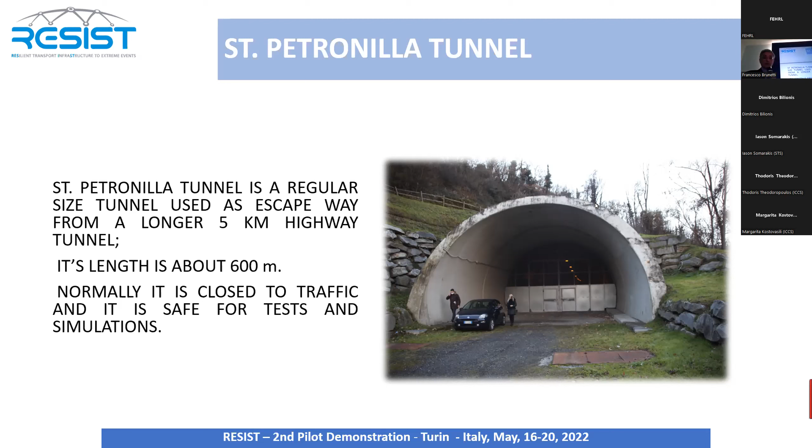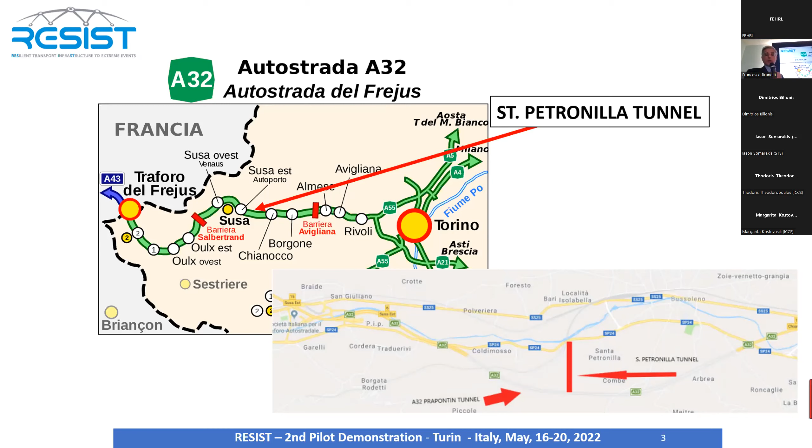This is the pilot in which we test drones flying without GPS or GNSS signals. The tunnel is about 600 meters long, and it is connected by a fire-safe door to the main traffic tunnel.

There is also a ventilation central to provide fresh air in case of fires in the main tunnel.

In this tunnel, we did all connections for networking. We installed Wi-Fi networking and tested Wi-Fi motion connection at traffic speed. We also have the SCADA and connection system for the motorway.

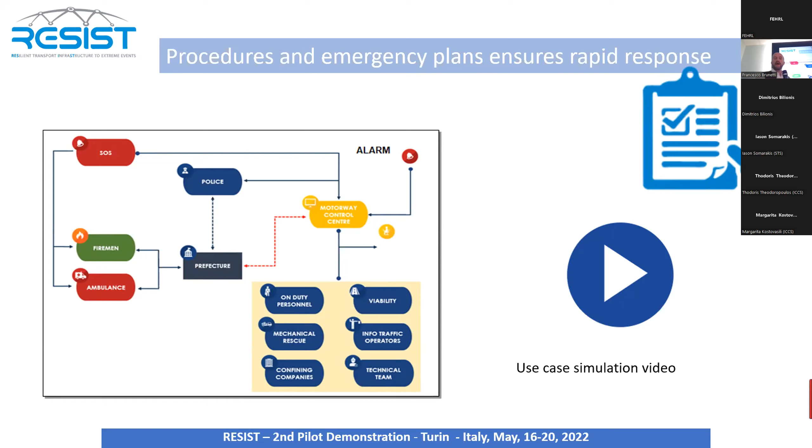So we have a simulation of a worst case, totally a fire inside the tunnel. We are thinking about how we can use the results of a project like Resist to improve the emergency plan.

For example, during the emergency, you can give an application to the user to ask for help. As you see, something is happening, and this is the main control room video showing that the operator can manage the rerouting. In this case, they are putting information on the variable message signs along the motorway.

They are able to receive the information from the application of the user cell phone, but inside of the tunnel there is no cell phone signal, so they can use the Wi-Fi inside of the tunnel to communicate in case of an emergency.

This is some simulation of what can be done by an operator. And of course, when everything is done, he can control what is the situation in the tunnel, or just reroute, as shown in the video, rerouting the traffic.

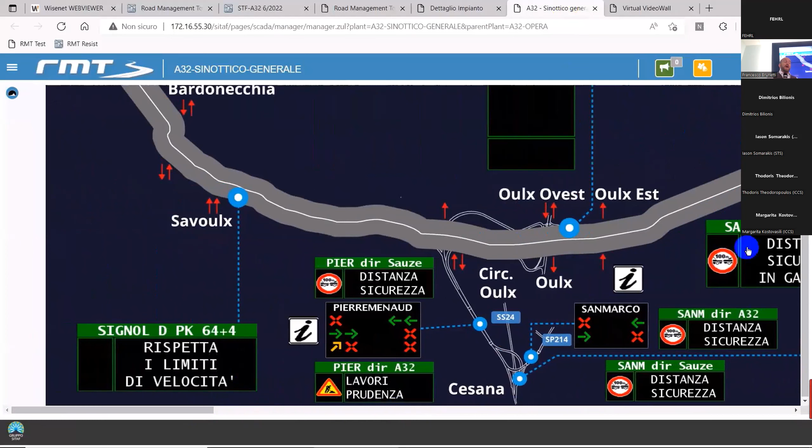But we are speaking now about, okay, we have saved the life, no problem, good. But after, what can be done in a situation where a fire has ruined the tunnel infrastructure, as we have shown in a presentation before?

We can think about using the communication enhancement we have seen that can be used during the event. But for example, after, in a very dangerous environment like a tunnel that has had a big fire inside, it's very difficult to reach the place to make visual inspection.

Or to make instrumental measurements. So one idea can be used also, the idea of drones, of new inspection shown by Resist, to add it in an after inspection also, not only in the preventive inspection.

Of course, predictive maintenance can bring a better quality of the diagnosis and the status of the infrastructure. This will bring for sure a better maintenance program, longer life of the infrastructure, and a better life also for the people that use that infrastructure.

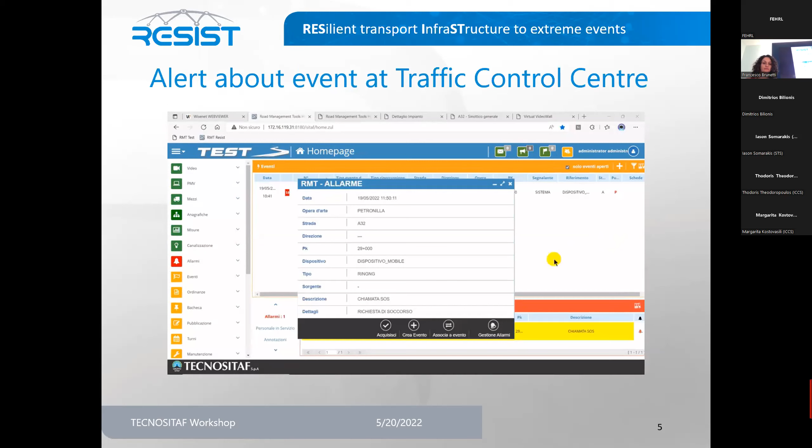So, okay, here you can start the navigation. And here we have, let's say, the alert at the traffic control center. We have the alarm received. Okay, I will skip this because I've already presented it before.

Okay, and here we have the receipt of the same alert in the resist platform. So as you can see here, you go to the events list, you select the exact asset, and here is the alert prepared from the traffic control center as well.

So then the operator decides to close the road in order to avoid any further incidents or accidents, and to prevent risk of users and so on. So the road is closed, the notification is sent to the users, and they also get some alternatives for rerouting, by passing the event area.

Okay, and then we can start the inspection of the area that the incident has happened. So as you can see here, this is the task list of the IPM operator. You can select to create a new detailed inspection process, assign specific persons to perform activities, for example, the drone operators, the computer vision operators, and so on.

So you create the new inspection. Okay, and then we have the preparation of the RPAS mission, the drone flight, actually. The drone operator needs a flight plan in order to know where exactly to go and what to check. So here we prepare the flight plan with a description, with some points and so on. Okay, you can see here.

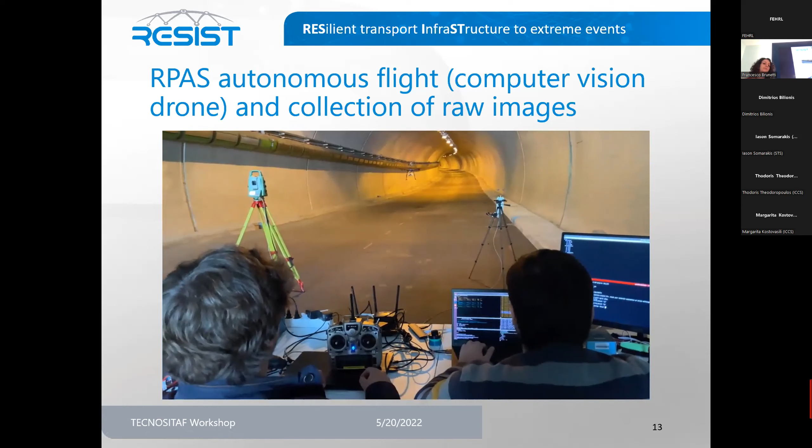Okay, so the drone is flying following the flight plan that has been prepared. During this flight, raw images are collected from the infrastructure that are going to be processed later on. And when the flight plan is finished, the drone is landed. All this through autonomous navigation.

Okay, then the IPM operator goes back to the resist platform and informs the system that the flight has been finished. So then the raw images, all the data that have been collected, in this case images, can be stored. Here you can see the storage of raw images. Okay, you can store the data to the platform.

And then the system processes these images in order to create some metadata and annotated images. So you can see here. It's paused. Sorry, this is paused. Okay, now.

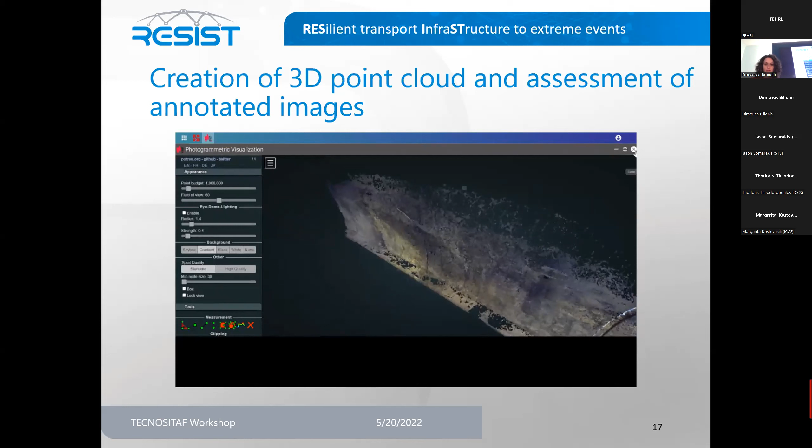And then you can see also the annotated images, the images that have been collected from the drone, and also some defects have been detected on these images, some cracks or some other defects. You can see here, for example, one crack. At the left, there is the list of all defects that have been identified with some information about the coordinates and so on.

And when this is ready, if the operator decides that more measurements are required in order to validate these defects, it can request a new drone mission, this time with a contact drone, in order to take some ultrasonic measurements and rebar measurements and check that everything is good or needs to be maintained or replaced. Okay, so here we have the new mission. In this case, this is with the contact drone.

Okay, again, we create the new mission. The mission is accepted. Again, there is the possibility to reject it and ask for a new flight plan, but we skip this part. Okay, and then we are ready to start the flight once again. The new flight with the contact drone. Okay, and here it is.

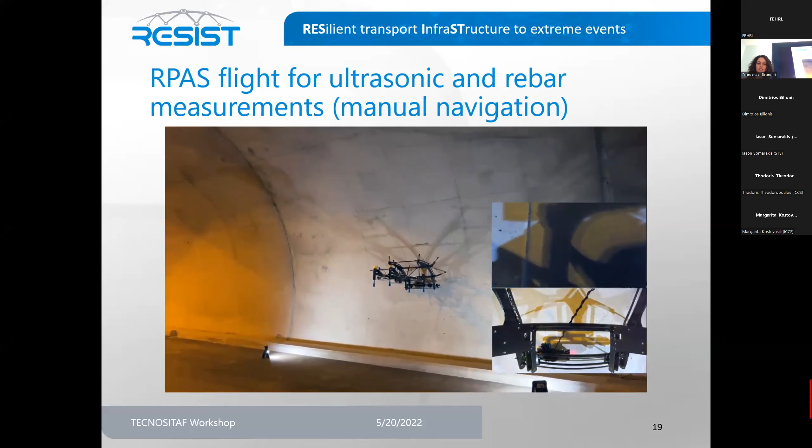So it scans the whole area that needs to be scanned, getting information from this. And when these measurements are completed, it lands again. Detaches from the surface and then safely lands. Okay, and here we have another similar flight. This is an autonomous flight, actually. You will see also the results of this analysis, the ultrasonic measurements and so on.

Okay, so we have the takeoff again. And here you can see the model of the tunnel. Again, it reaches the wall. You can see it also from the shadow of the drone. And then it contacts the surface. And you can see also the footage from the analysis of the measurements from the sensors that are embedded in the drone. Also the angle and so on. Okay, and then when the measurements are completed, the drone lands again.

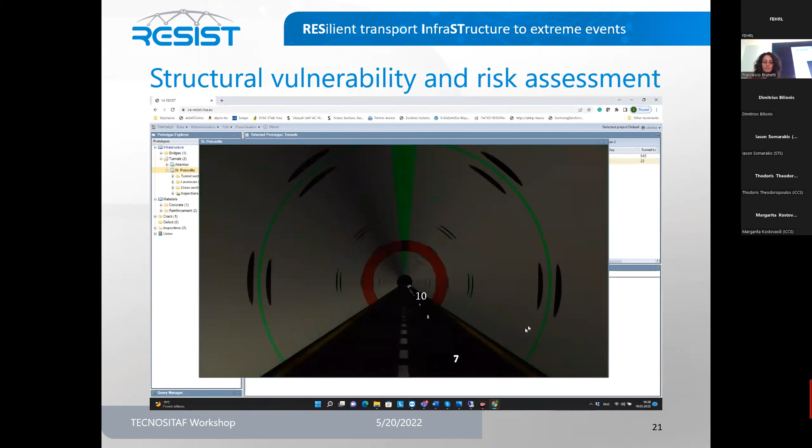So based on this analysis and the extra measurements that have been collected, the structural vulnerability and risk assessment can be performed. Here you can see the other module of RESIST. So you can select the asset. Here the St. Petronilla tunnel is selected. You can see the model. Oops, sorry for this.

This is the area that is marked to be inspected. The results of the measurements and their analysis. Some graphs that are prepared, the areas that maybe need to be further examined or inspected or replaced, and so on. Information that's needed for the maintenance of the infrastructure. The analysis of the defects. Here you have a crack, some information, coordinates, and their related images, annotated images, and their analysis.

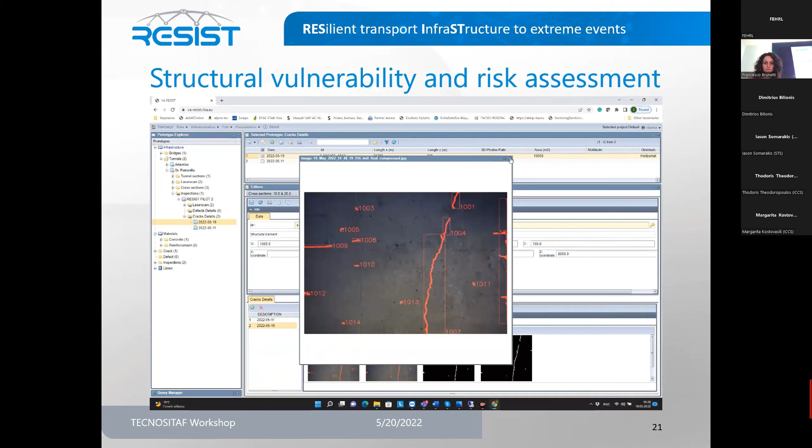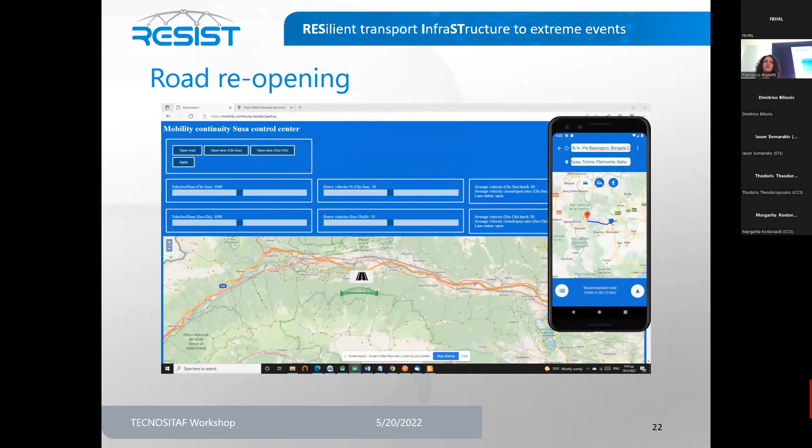Okay, so when this part is finished, if the operator decides that the infrastructure is not affected and the road can be given back to the operation, then through the dashboard, the operator can reopen the road, reopen the tunnel in this case. So the notification to the users disappears. We will see it. Okay, it disappears. And in case a user searches for this route, the initial route through the tunnel will be proposed again. So this is it. I hope it was interesting.

So I think, thank you all. I think that we can now the participants that are here in person. And then we can go to the field to see the actual performance of the drones, the flights and so on.